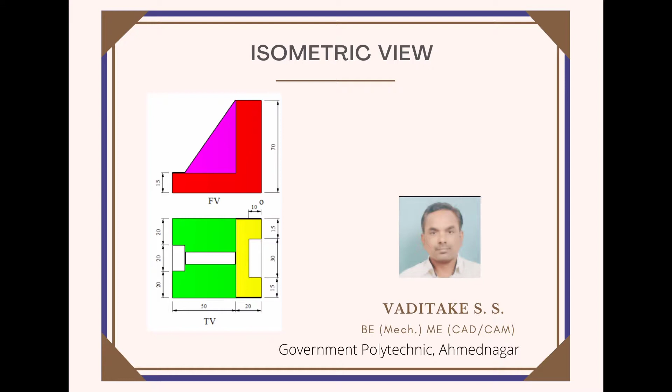Observe carefully the given front view and top view. First trace out or observe origin O. Then find out its length, height and width.

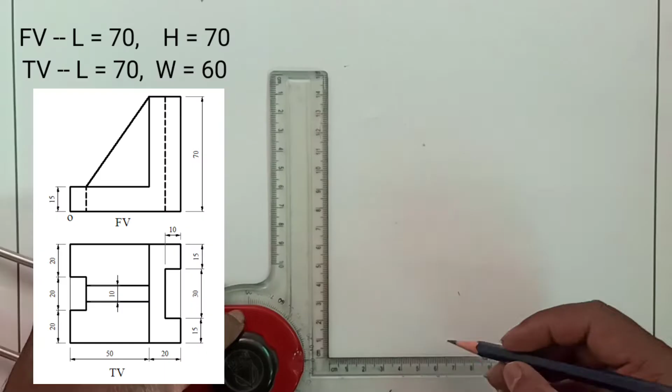From front view, overall length is 70 millimeter, height is 70 millimeter. From top view, dimensions observed are length 70 and width 60 millimeter.

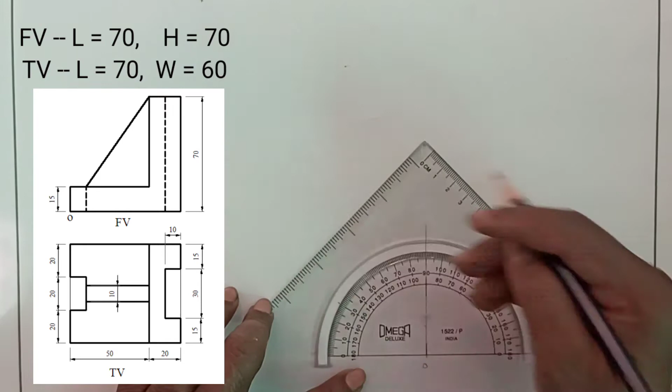Draw a horizontal line, mark origin O. By using the protractor, set two angles of 30 degrees from both sides of the vertical line. Now draw the length passing through origin O, of length 70 millimeter.

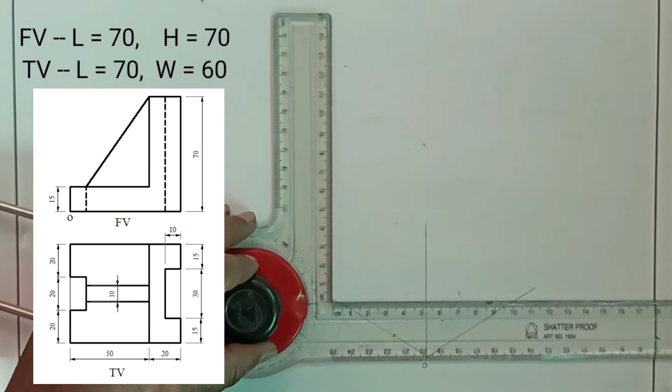Draw the width of 60 millimeter passing through origin O and towards the left side of the vertical line. By using the mini drafter, draw vertical lines parallel to each other of length 70 millimeter.

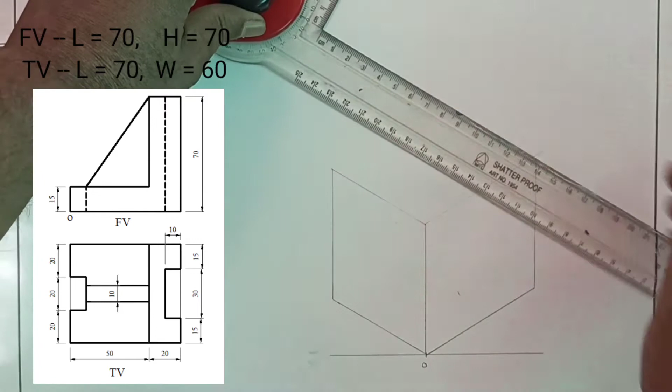Then draw this width of 60 millimeter, and draw a line parallel to the length. Thus the box is completed, which helps us to draw the isometric view.

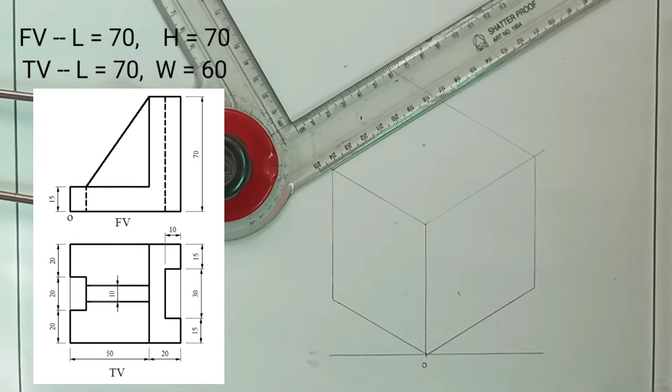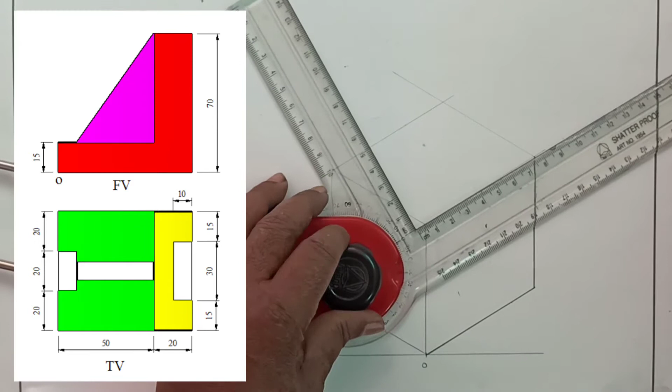Now we will start to draw the isometric view. Refer to the red colored L-shaped geometric shape. Try to read its every dimension, especially in terms of length and height.

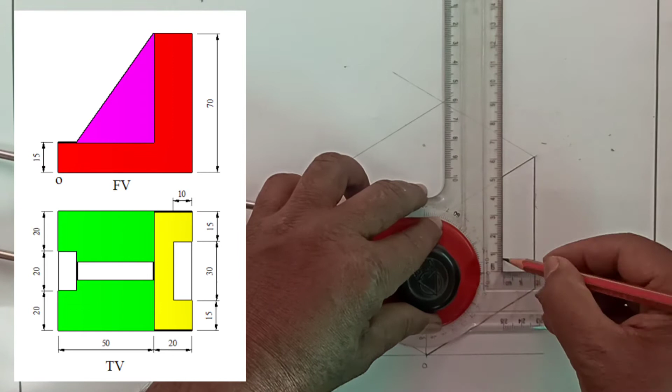Now we are drawing this line which is parallel to the length, of 20 millimeter. Then draw this height of 15 millimeter. So draw this line and complete the L-shaped object.

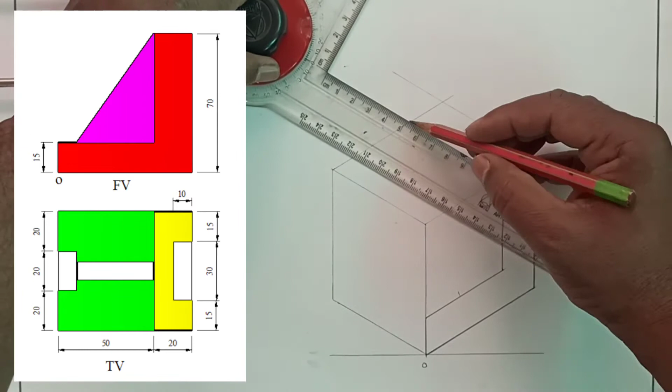Now we have to locate this pink color surface. The pink color surface is located at a 25 millimeter distance from this red color surface. So locate this pink color surface and set the dimensions.

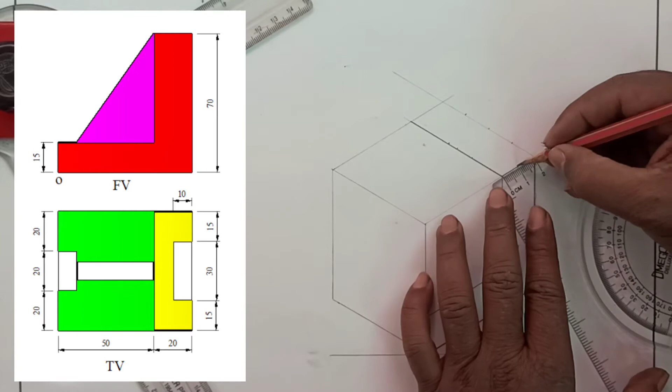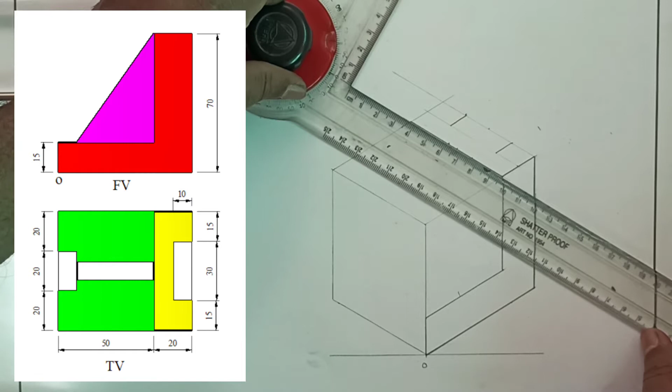Here we are trying to draw this yellow color surface, which is observed in the top view. Read out or trace out its dimensions in terms of length and width. Setting all these dimensions, complete this isometric view of the yellow color surface.

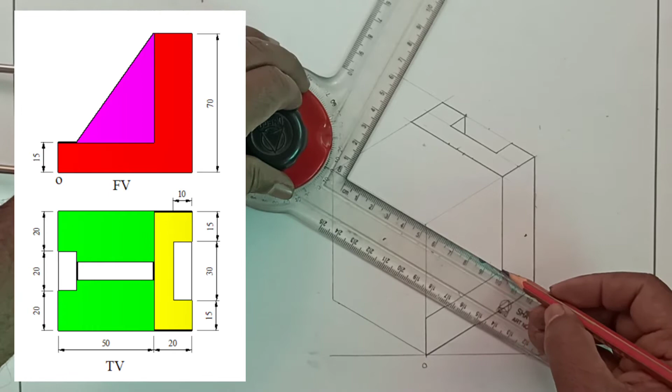Now to draw this pink color surface, draw this line of 25 millimeter, because the position of this pink color and red color surface are apart by 25 millimeter. By drawing a vertical line in terms of height, we can easily locate the position of this pink surface.

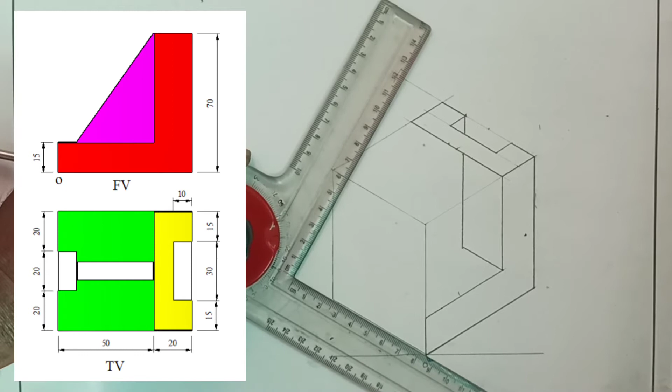Now to draw the length of this pink surface, draw this line up to the slot line.

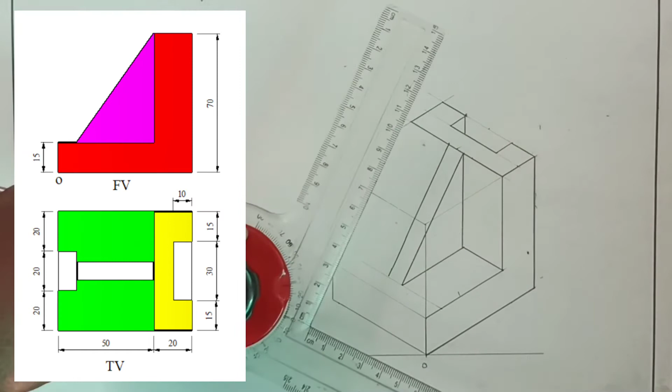Draw this 10 mm line parallel to the line so that we can easily draw this slot. Draw the vertical lines. Locate the corner or edge line of this slot.

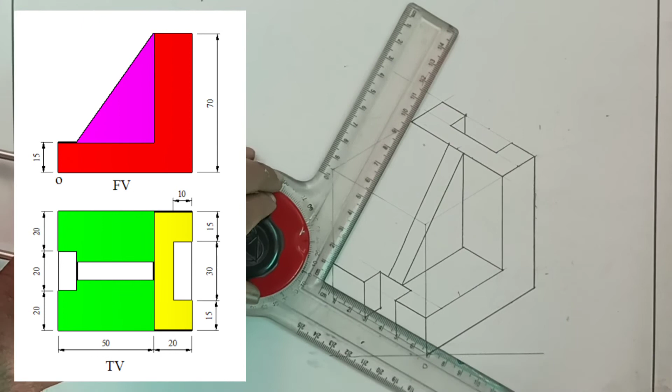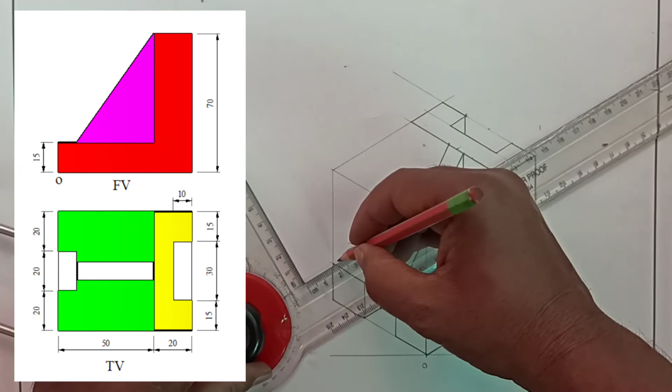Drawing parallel lines, parallel to the length and width. And draw this vertical line.

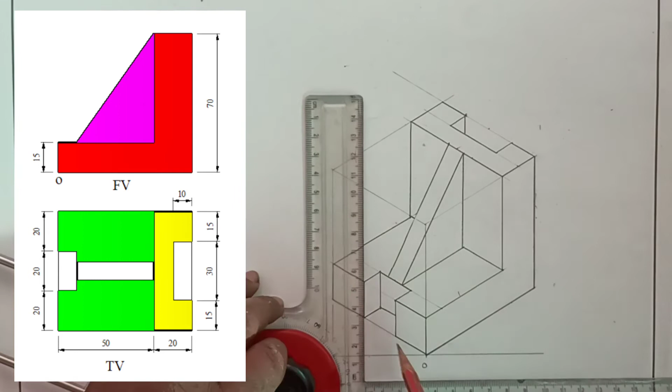Give the dimensions. Dimension lines should be parallel to these basic three lines, that is the overall length, overall height and overall width. Isometric view is nothing but drawing a number of lines which are parallel to the overall length, overall height and overall width. So skillful handling of a mini drafter helps to have accuracy and speed in drawing isometric views.

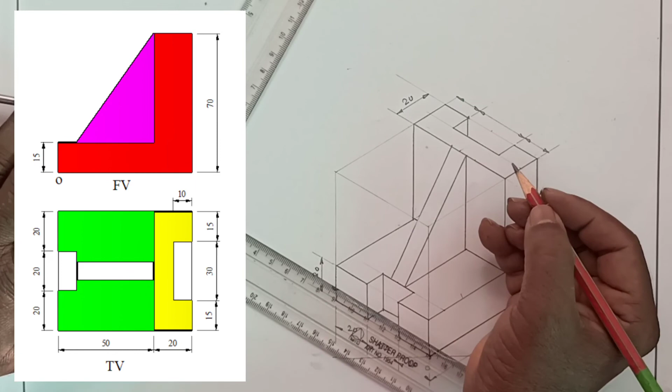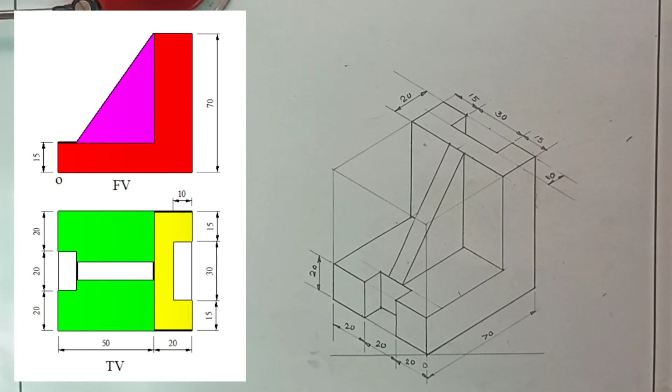Maintain the uniformness of the number heights. Control line thickness and darkness by skillful handling of a pencil. While drawing the lines, try to turn the pencil a little bit so that uniform thickness will be maintained.